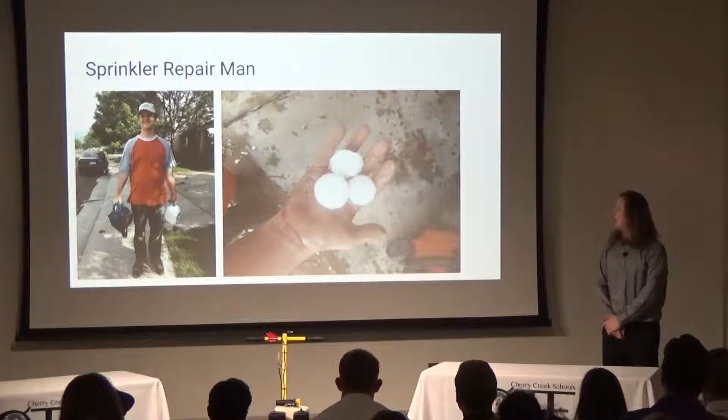The project objectives for this - SolidWorks CSWE used to be one of my goals for this project, but the CSWE was going to take too much time, and during the year I took a job shadow with Micron, which is a manufacturing company who works in automation, and they use a program called Autodesk Inventor. So I learned that other companies use different programs than just SolidWorks, so I didn't want to waste any more time or money investing in SolidWorks if I might not be using that in my professional career.

I wanted to be a better public speaker, and I also wanted to learn the basic knowledge of how to make something, or go through the process of having an idea and manufacturing, and all the different steps of the prototypes and ideas and mock-up sketches.

I started in October. We all did project proposals, and I didn't really know what I was doing. It was all generic, and so this all basically changed.

In the beginning I stuck to it, just researching through how tree roots change the dirt physics, and if I would need to know any of that.

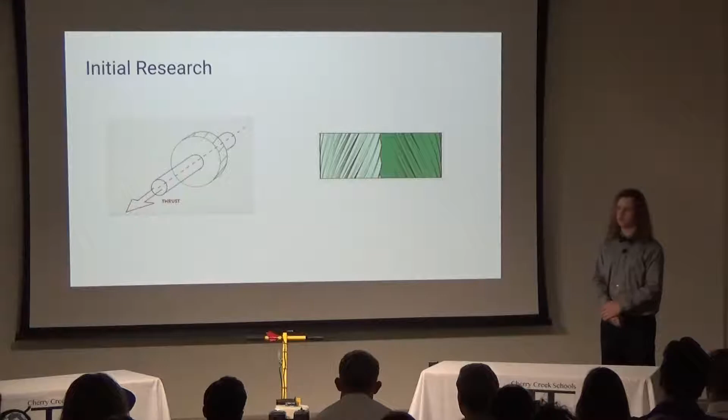I was also researching how different types of trenches fail - there's a bunch of different types like sliding and toppling and boiling. Boiling was one I was worried about in the beginning when I first heard about it, but it's relating to the water table where all the water is - you dig so low that the water starts seeping into the bottom and making mud, and could eventually even crumple the wall if it does heaving and squeezing instead of boiling. But I didn't have to worry about this because water tables are all way too low for sprinklers, and I wouldn't be able to dig that low with my trencher.

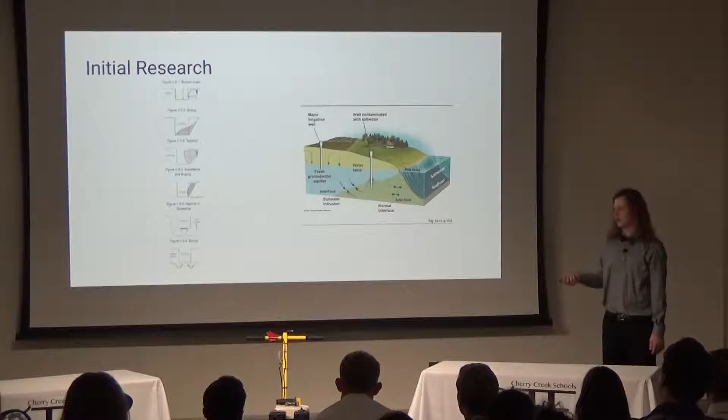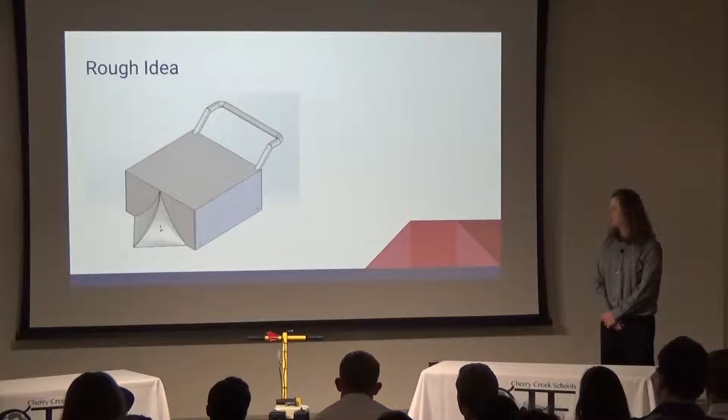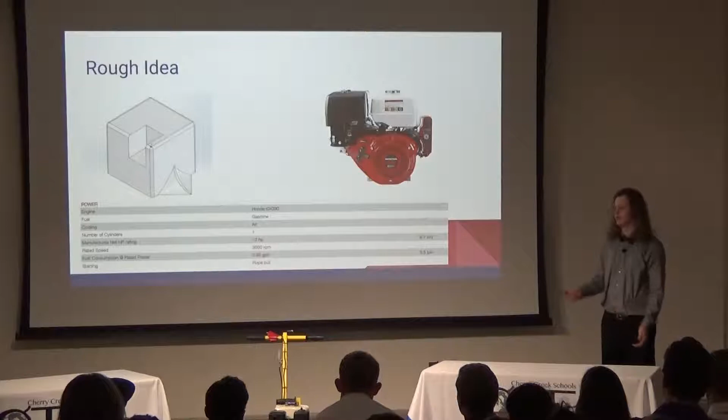Didn't know where any of that would be or how it would look. So my next revision was just a bigger box, and I looked up Ditch Witch, another company who makes trenchers, probably one of the biggest trencher makers. I looked up their smallest model, the C12, and this is the engine they used for it. So I looked up the specs, how big it was, and put a cut in for where the engine would be. I picked this engine for the reasonable price, but it's not the same as the one on there - this is a smaller version.

My advisors were Rodney Preddy, my grandpa who lives out in Delta. He was there to help me learn about welding, all the different types of manufacturing processes to get to a final product, and teach me how to do it safely and make it strong and actually be able to work.

My support advisors were Chris Vitrizzi, my first cousin, who is in construction and manages tools and rents them out to other people. I thought he would be a great fit for making a tool, but he wasn't able to help me much with trenchers because he didn't deal with that too much.

Another support advisor is James Serco, here in the audience today. He was supposed to help me with the Solidworks design, but I moved away from that in my project, so I didn't get to use him too much. But in the beginning, when I was doing the mock-up sketches, I sent them to him, and he gave feedback about how it needs to be heavy enough to keep it all forced down and dig a good trench in the ground instead of bumping up without a controlled depth.

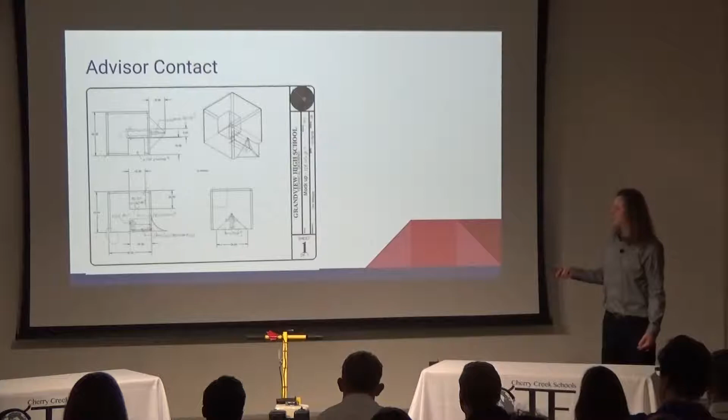One of the big roadblocks and pitfalls was he lived all the way in Delta, a 5-hour drive without traffic. One time there was a car accident right outside of Georgetown, and we got stuck behind it. They closed off the road because the crash was blocking it with all the debris, so we were stuck there for another 2 hours, making the trip a whole 12 hours going up to Delta and back.

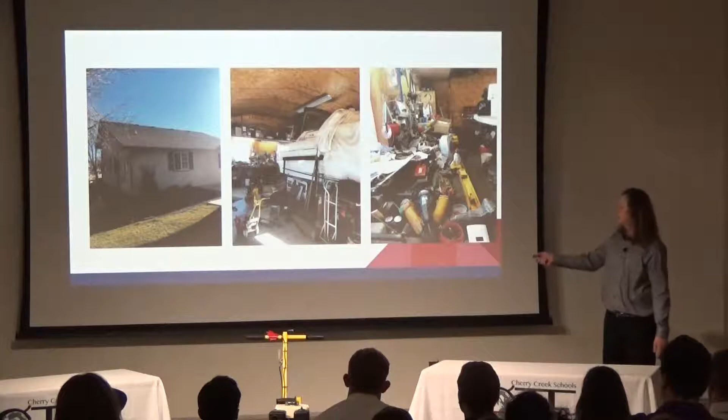Up in Delta, this is my grandfather's shop that I used to finally come up with my product. This is how big it is - I'd say up to 20 feet.

This is the original bar. We had to cut it up and shorten it because where the axle is on the wheel, the chain would hit it and ruin the chain. You'd have to go through entirely remaking the axle and putting it a little further back.

For the solution of him being so far away, we had to lay out a plan really solidly, have all the parts picked out and what we wanted to do. We eventually did that over spring break, but it took a while for us to finally have a good laid-out plan. In November, I was researching more just to catch up to where I was with all the other progress I did with my Solidworks, catching up all the information with all the designs.

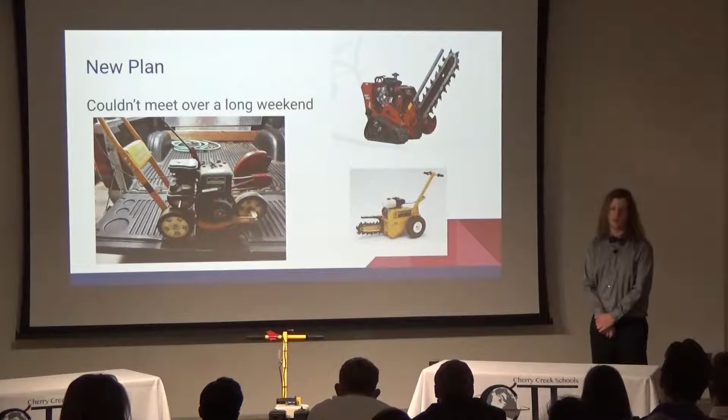I had to make a new plan because we couldn't meet over a long, like a 3-day weekend, during February, so we had to make plans for spring break and push it back to then, and started looking for all the parts to bring.

In February, I had to do a bunch of height selection because I knew I was going to need it later, but in the end I didn't have to because it came on the groundhog trencher. What I was designing was a lawnmower-type height selector where you pull out from the spokes and put it onto another one, and it lowers as you rotate it around the outside of the height selector.

Then I started modeling the little edger you saw earlier, but we decided it wasn't good enough, and I stopped working on it after February.

In March, I modeled more of the framework right at the beginning because we hadn't made the full decision yet. Right before spring break, I started getting ready for Delta V, making a bunch of SolidWorks plans from just the specs he gave me over email. During spring break, I was working with my divider, and into the 29th I was working on the journal and updating the website from all the work I did over spring break.

During spring break, we drove up near Boulder, where we found a groundhog trencher for $1,100. It was used, and all the parts we were going to buy separately were $1,500, and that wasn't even all the parts used in the groundhog trencher, so we just bought a whole one for about $400 cheaper.

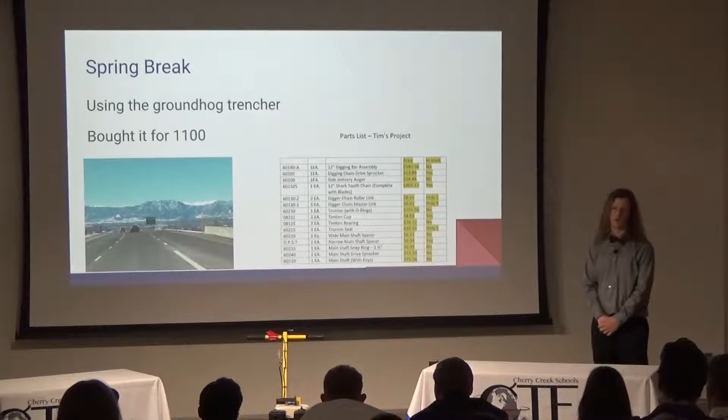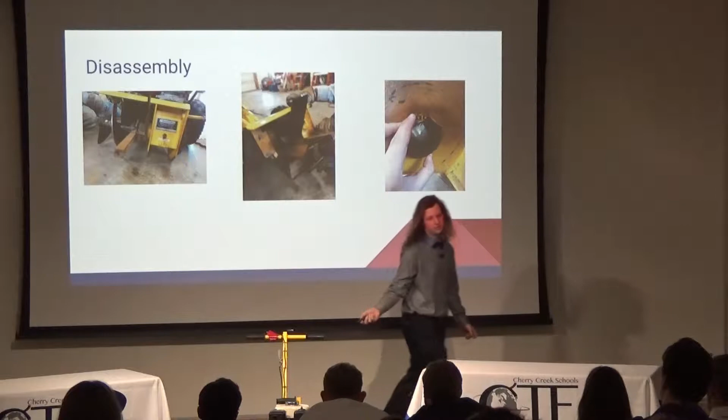When I finally got there, we waited until the next day, and in the morning we got up early, 8 a.m.-ish. Then we started disassembling everything off of it that needed to be taken off, like the trunnion in the front here, with all the bars and gears, motors and stuff, just to get down to the base and take that off so we could put it on our own base that we make. We got there on Sunday, right?

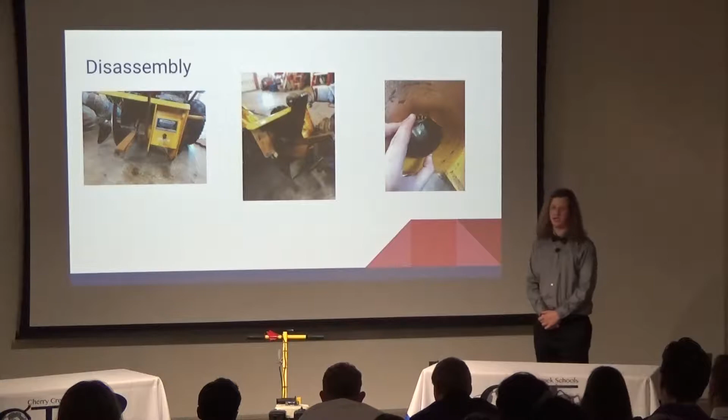Going through it, it was the weekend, so we couldn't even buy any of the stuff to make the base. So we were just going through and cleaning all the parts with gasoline as a solvent, old expired gasoline.

You can see here the trunnion, in the front, which is the hinge. It works with this height mechanism, where a bar runs under it and attaches to this hole right here. When you move it this way, it pushes the bar under it that way and rotates it up because it's pushing this entirely this way. This is the housing for where the trunnion was, because I didn't know how our base was going to look at that point.

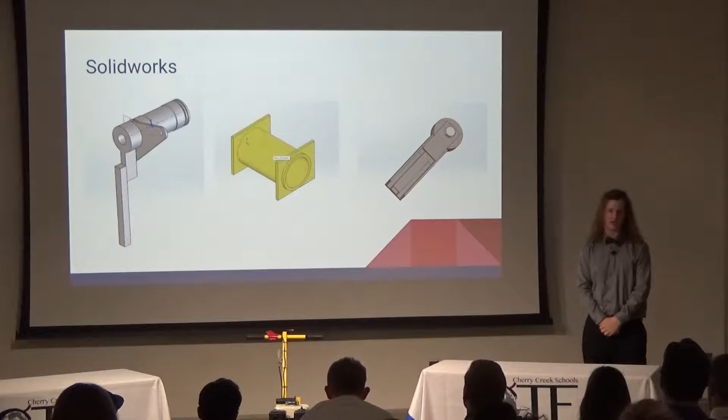This was me designing a shorter bar. I used global variables in SolidWorks, a tool where you have a spreadsheet and can set any dimension to a variable like X, and name the variables so it's organized. Then in the table, you can just change the number whenever, and it changes it in the real sketch as well.

As I was going through building this, I was designing it backwards, flipped. The bar was originally out in front, and I needed the plow to put the grass out of the way. So I had to put the bar under and flip the entire base and the engine, because the engine didn't have any way to reverse which way the torque was coming out of it. The chain would be turning the wrong way, and everything would break.

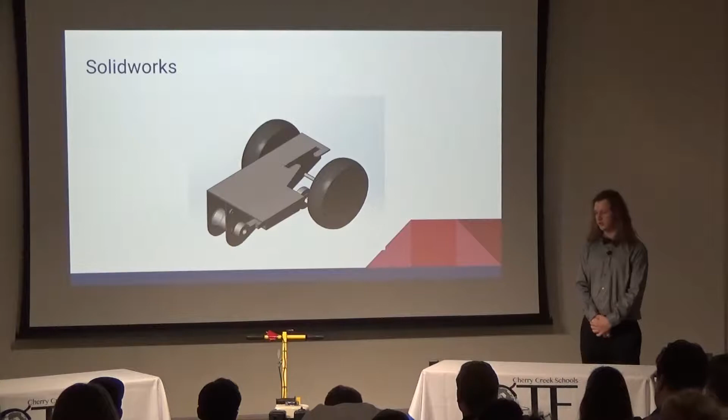You need a really steady hand the entire way. When you're going through, you look for where all the metal is hot and glowing, and you try to follow right ahead of that, and fill in the hole so it's even.

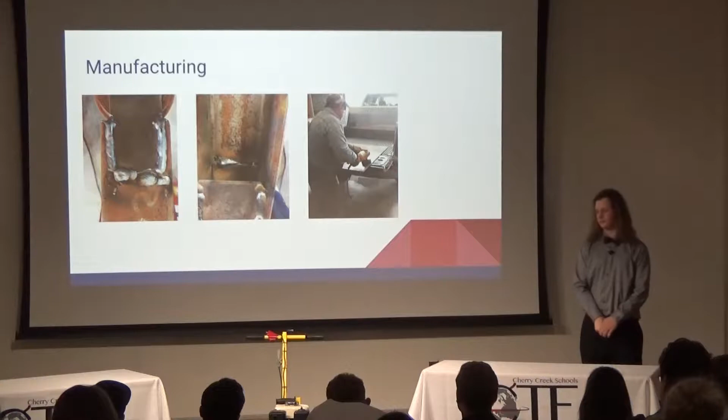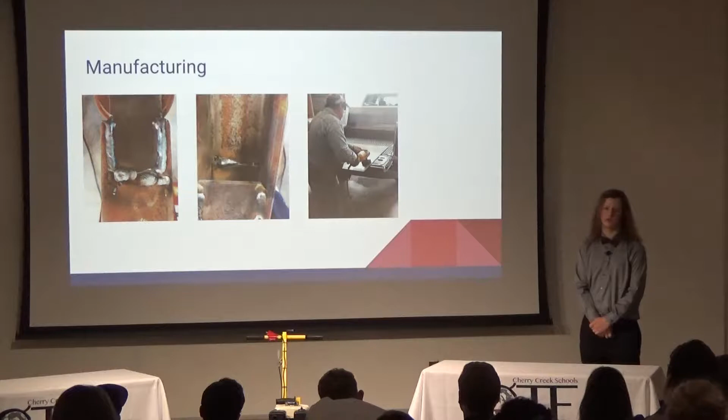This is us using soapstone to sketch out the entire outline of it. Soapstone is a sort of chalky substance, and it doesn't burn off like Sharpie would at 6,000 degrees Fahrenheit. So while you're tracing along with your torch, you can follow along, not lose your place, and not have to freehand it the whole way through the weld.

We used this as a ruler, a straight edge, and clamped it down on either side and followed it with the acetylene torch to cut it down. The acetylene torch has two gases—acetylene and oxygen, I believe. When you're using it, you have to turn on the acetylene and oxygen, and turn the oxygen knob on the bottom.

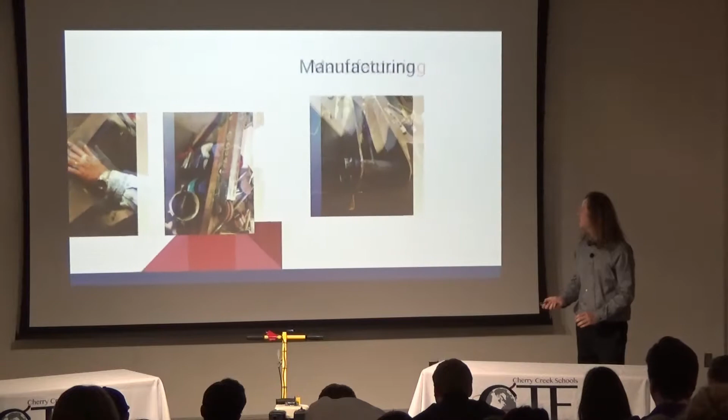There's a knob on the bottom. You turn it until the flame is just a little bit, so the acetylene is coming out, and then you take a starter to the tip of it and start it. It's a big, really broad flame, not good for cutting, and a lot of black smoke comes out of it. What you have to do to hone it down is turn the oxygen until there's no more black, then at the top you turn it until the flame gets really short and thin.

Then there's little tiny, like 1 millimeter, blue flames coming out of 6 little holes on the tip, on the outside of a little oxygen line. Those 6 are the acetylene, and while you're turning the knob on top, it hones down the flame. There's a lever on it to put more oxygen through and cut hotter, to actually make the cut. When you push it down, you want the little millimeter flame to stay the same size the whole time—when you're pushing it, that's how you know it's going to be a good cut.

For the welder, for welding, we set the big top plate upside down on the table, and had 2 magnetic 90-degree holders. You just set up the 2 side plates, one at a time, and have the 90-degree angles on the outside of the weld. Then you angle the metal slightly away from where you're welding, because all the heat and cooling is going to bend the metal towards the weld, and that's how you mitigate the bend.

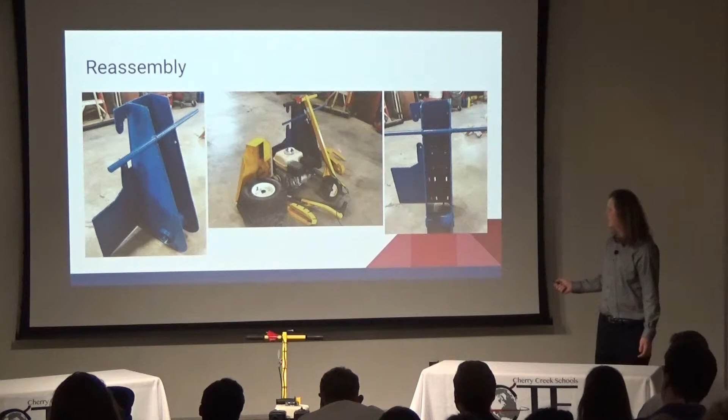And then we spray painted everything blue, and then that's all the piled parts before we started assembly.

And then you can see us put on the bar there and the wheels and everything. You can see the bar. That was our first time seeing the bar not touch the axle, so we knew our design had worked, making the bar shorter. And here you can see the handlebars, the adjuster back on there.

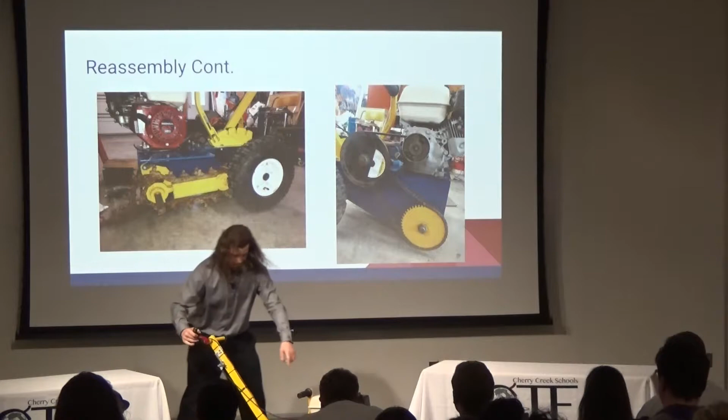And here you can see the right side of the centrifugal clutch. This is just a sprocket here, and there should be on here, you can see this gear at the bottom here. That is tension gear to keep the chain tension the entire time, not loose and flapping around while you're spinning through the turning.

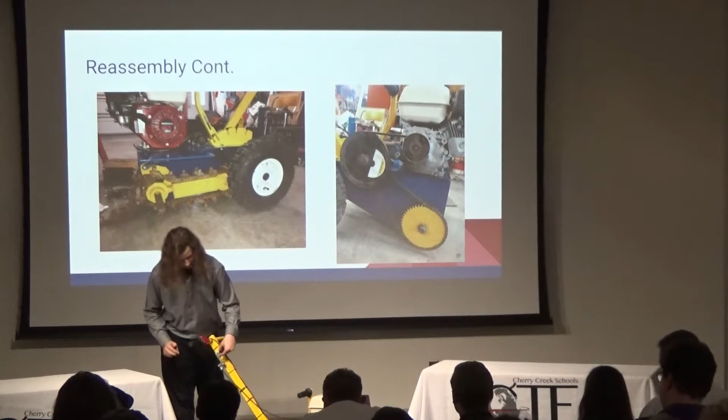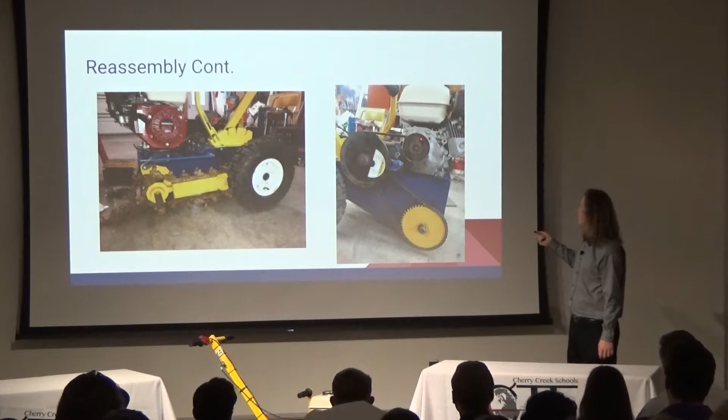So, going through this, you can see the centrifugal clutch up here, and what it does is on the inside, it spins, and these two big chunks of metal here, they spin with the inside, and as it's going faster and faster, these springs start letting go, and then it engages with the outside and finally turns the entire length of like chain belts in the entire gear.

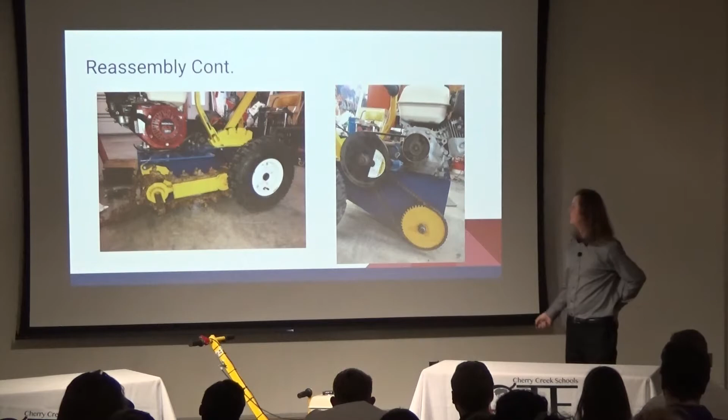And I'll start it real quick.

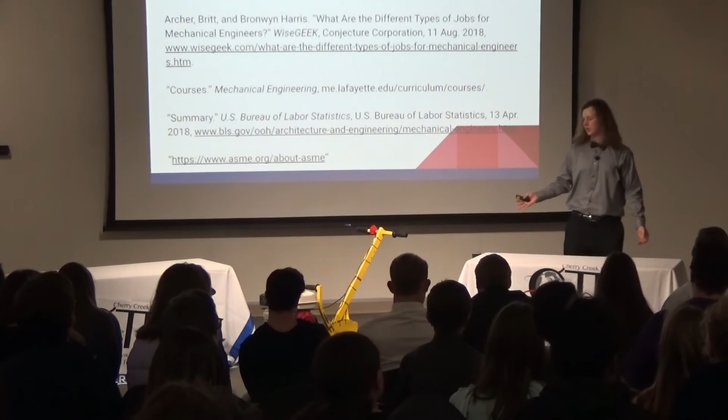Other questions? How deep does it trench? The first hole here goes 6 inches, 10 inches, and 14 inches, I believe. I didn't remeasure it from changing the bar length, so I'm estimating based on how much we took off the bar. And where are sprinkler lines? They're not too deep, 6 inches is the most a sprinkler line should be. And then with sprinkler heads, they go down anywhere to like 10, 12 inches for a basic home sprinkler system.

Well Tim, this is kind of opportunistic for me personally. I have a tree whose roots have sucked in the sprinkler lines. I'll get you my number.